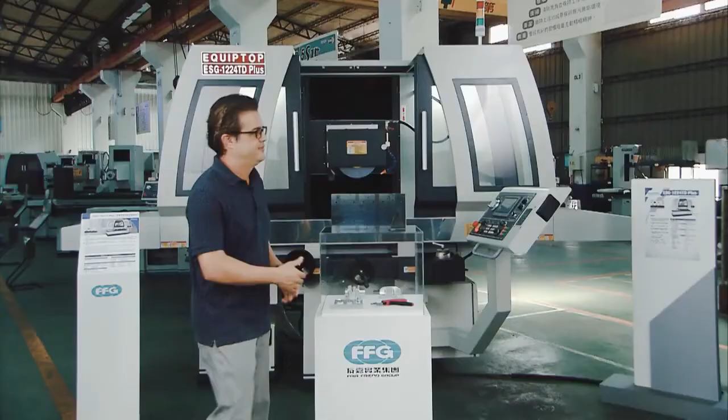How are you? Nice to meet you too. How did you do it?

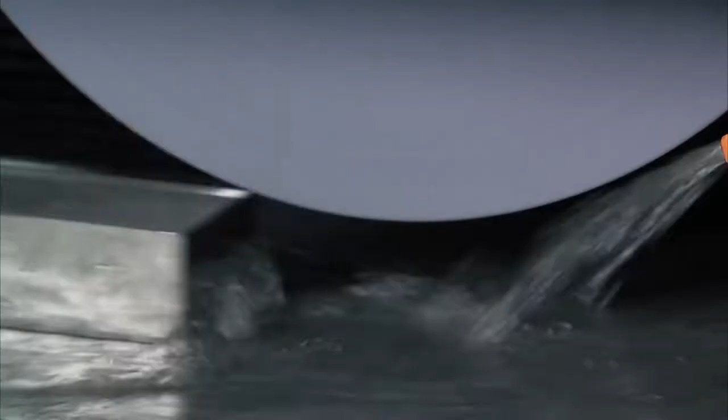Today we're at Equiptop, and we're going to have Paul Lin, the sales director of Equiptop, show us how to use this very well-designed touchscreen panel. Paul, can you show us how to use this?

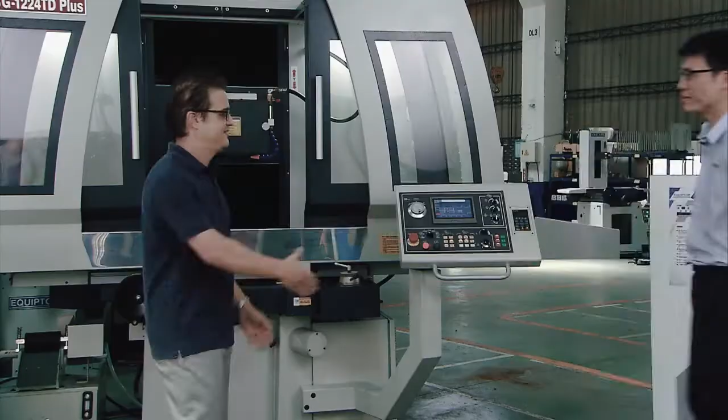Hello, Robert. Nice to meet you. How's it going, Paul? How are you? I'm fine. Good morning, sir. Can you show us how to use this touchscreen panel? Because it looks very well designed, very well laid out. Sure.

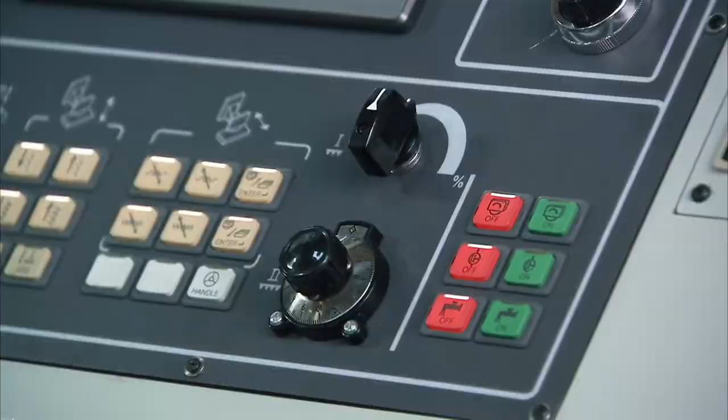Let me introduce the basic function. This controller panel includes several languages depending on the demand from the customer. Now I'll show you the English version. This machine displays the Y and Z position here by the encoder device.

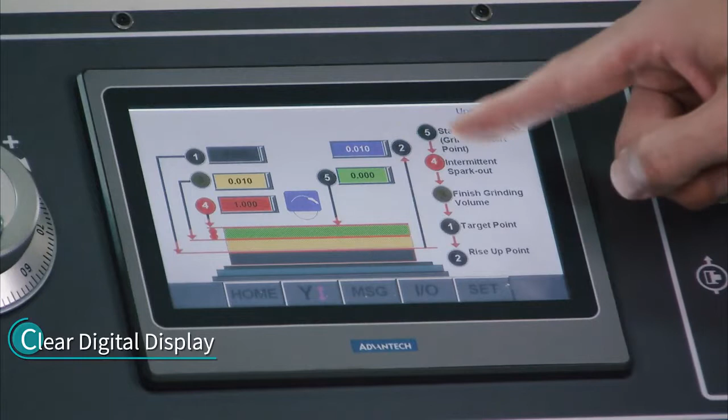You can set the touch point and the distance to go, the position, and the rough grinding and fine grinding micron setting. This page is for setting the micro downfeed, the grinding value setting operation. You can set the target point, rise up point, finish grinding volume, intermittent spark out, and the start point.

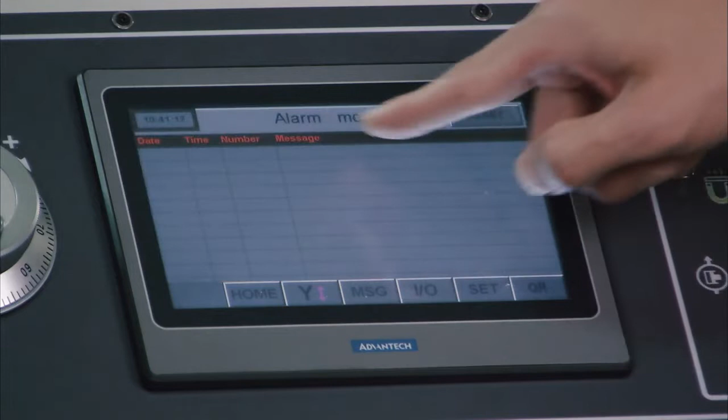This page will show you all the alarm message recordings. Any problems, we can see it right here. We can see the alarm message showing here and find the solution with the technician and the electrician immediately.

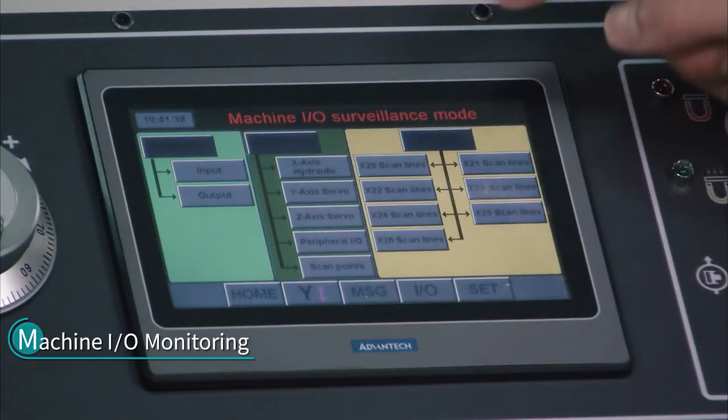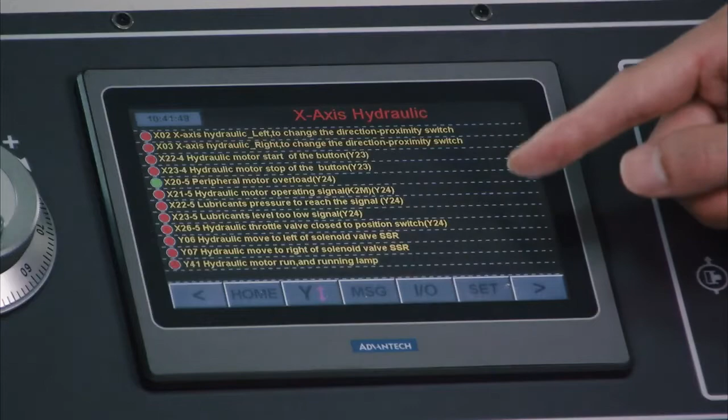Also, this IO monitoring page is to check all the devices, including this machine, how it's running, such as the hydraulic system. You can see each device, what happened. This is very detailed and comprehensive. You can see the servo motor for the Y-axis and its running condition here, like this one. And this is for the Z-axis servo motors.

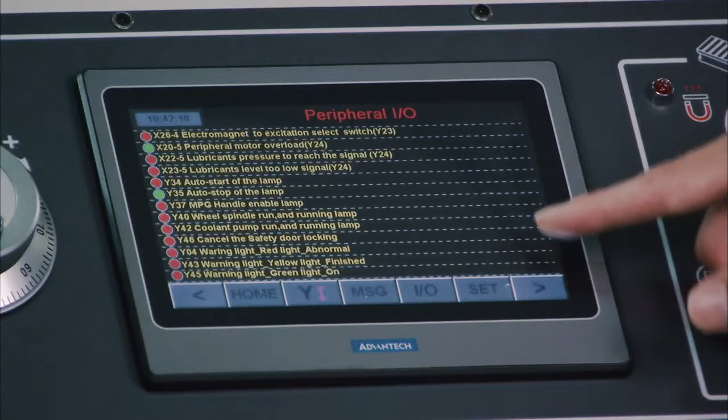Well, it's a very nice laid out panel. It looks pretty easy to use. I mean, it makes me want to feel like I want to get in the grinding profession. Sure, it's a friendly operation interface for the basic and for the professional operator and the technician. It's easy to understand how to use it.

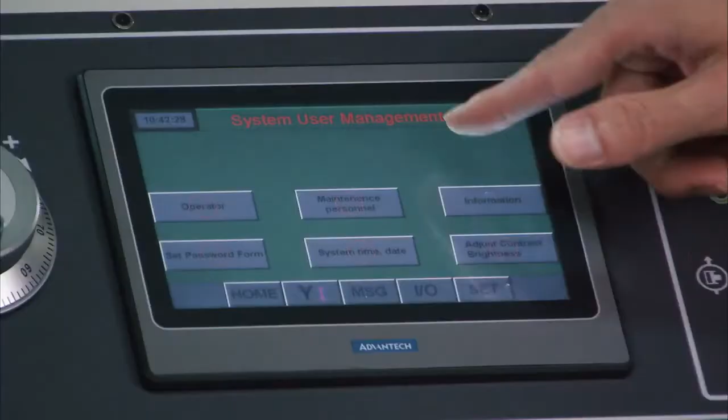And this is a parameter setting here. Any parameter could be set depending on the demand of the customer.

So we'll show you the other function about this machine. Now turn on the magnetic power here, and adjust the magnetic power to the maximum here, and finish grinding. Now this demagnetizer - it's possible to shorten the demagnetizer time here from this knob. This is a basic function and easy function to control the magnetic power here.

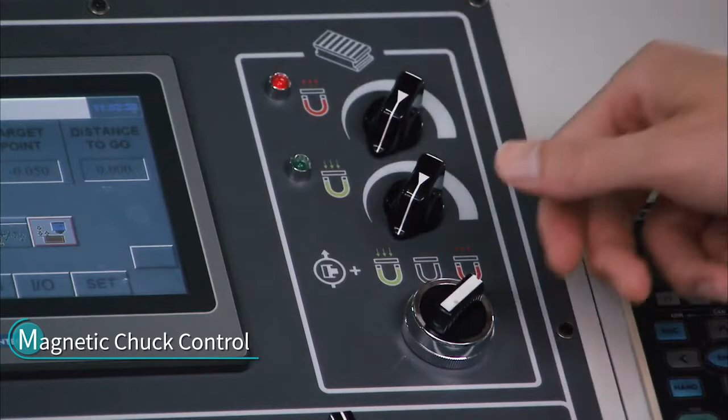And this one is to control the grinding wheel, hydraulic system, and the coolant system here. And this one controls the rough grinding speed - there are 5 grinding speeds here.

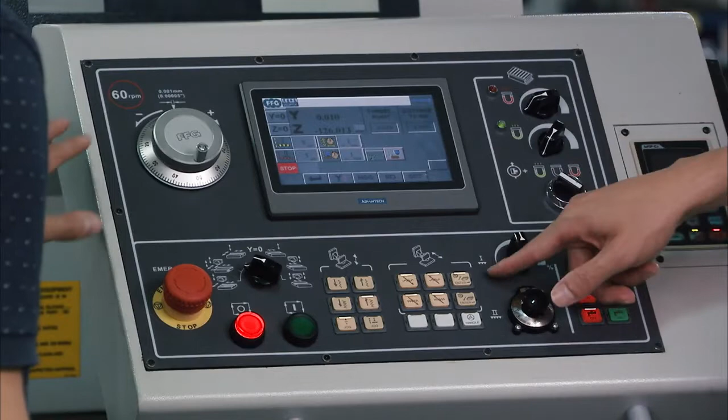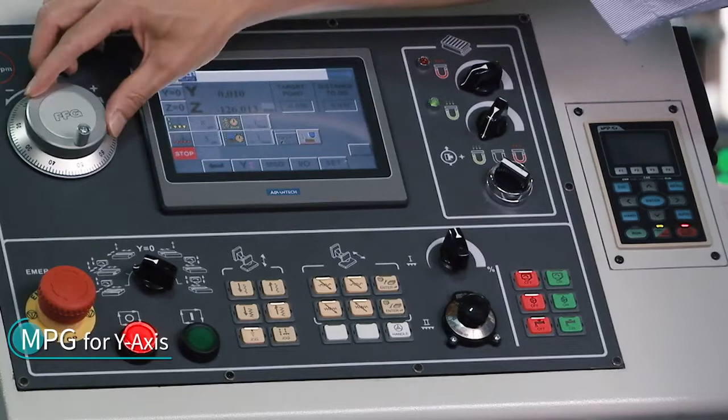I see you even have the MPG in the control panel. Yes, this MPG is a standard function for this machine. It could be adjusted 1 micron each time you turn each graduation here. That's very easy. It's very fine resolution here.

And this is for setting the point for backward and forward position here. When you want to operate the cycle start, just push here. Hey, I think I can do this myself. Yeah, you can see yourself.

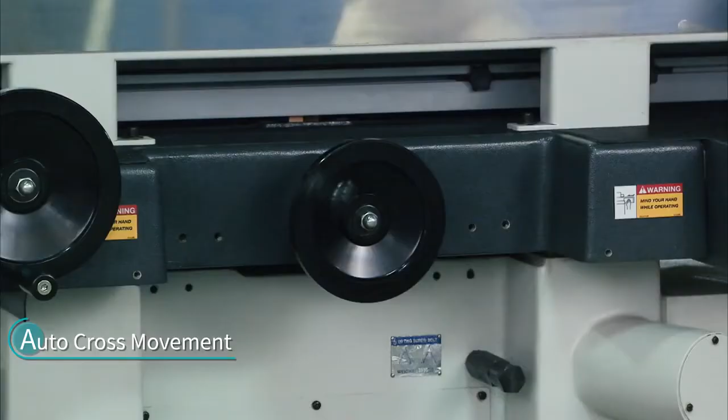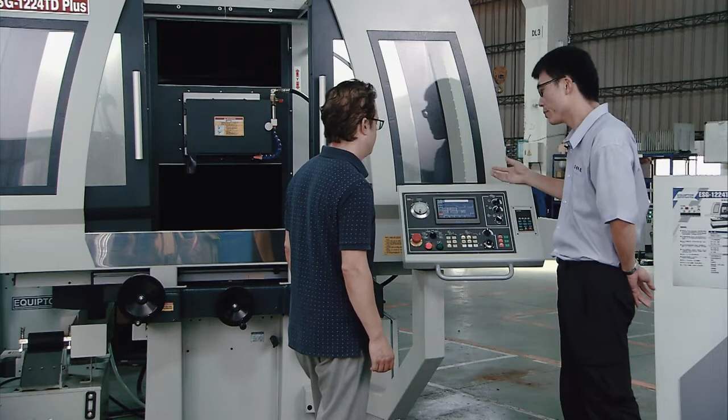Very good - this is to move the machine manually, and it's easy. Oh wow, and you can see the real-time position to move the table, depending on the size of the workpiece here. And this is vertical, up and down.

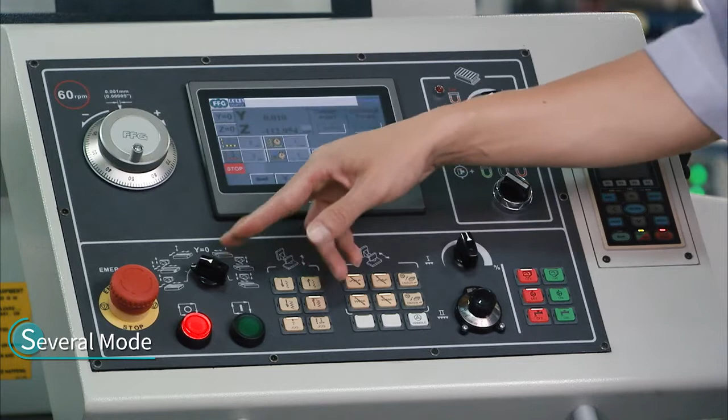You can select a different grinding mode here - this is the standard and the professional grinding machine. Now, what is this over here?

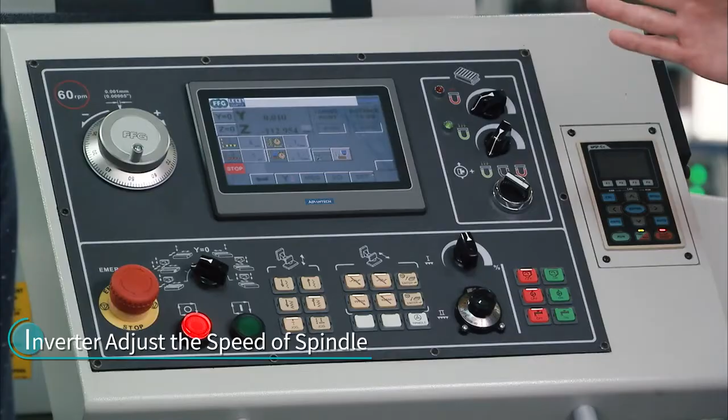This is the inverter to control and adjust the speed of the grinding wheel. So you can select faster or slower grinding speed, depending on the grinding material, to provide higher accuracy and surface finish requirements. Now, Paul, can you tell me a little bit about the structure of the grinding machine?

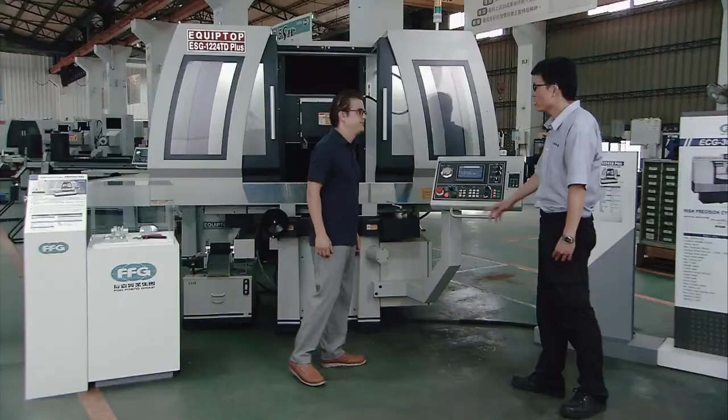That is a critical part for your whole operation, precision and accuracy. Our machine's high precision and stable iron casting is supplied by Meehanite system for the base, for the column, for the machinery body.

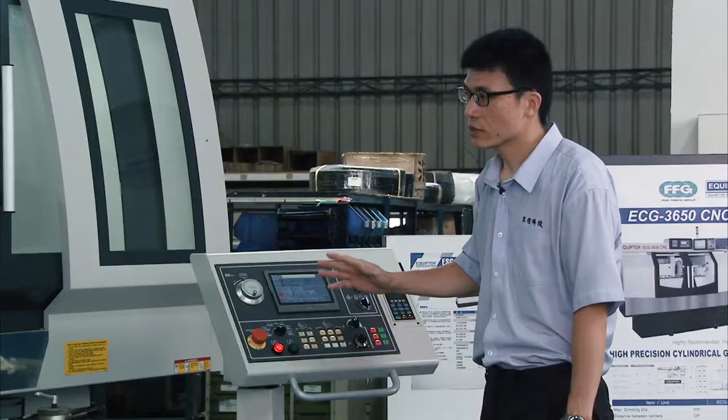The machinery Y and Z axis are driven by the servo motor inside the electrical cabinet, and the X axis is driven by the hydraulic system.

This hydraulic valve controls the hydraulic power, to control the speed of the machine running.

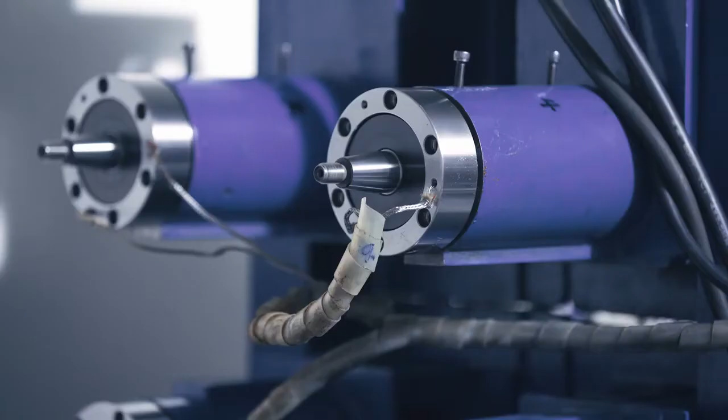The machinery overall has a full guard with top cover to provide better protection for the operators. And the bearing inside the spindle, supplied by NSK, provides higher accuracy and quality, precision, high quality bearings.

We can install the optional auto dressing system and compensation system on top of the grinding wheel. Normally here it's an option, our ADC system.

Now we're going to hear from Paul more about the smart manufacturing capabilities. It's intelligent, it's networked, and it's got lots of features to help the operators, right, Paul?

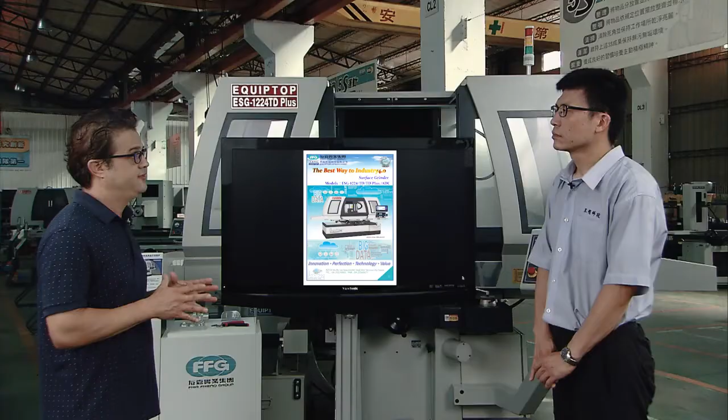Yes, this machine ESG 1224 TD Plus is the best way to Industry 4.0. Later I will introduce information about the network and the monitoring system assembled in this machine.

This machine includes cloud computing, big data, HMI, and IoT system. It also provides efficient network service such as integrated network information, in-time maintenance with guidelines, remote checking and system maintenance, reducing service time and increasing efficiency.

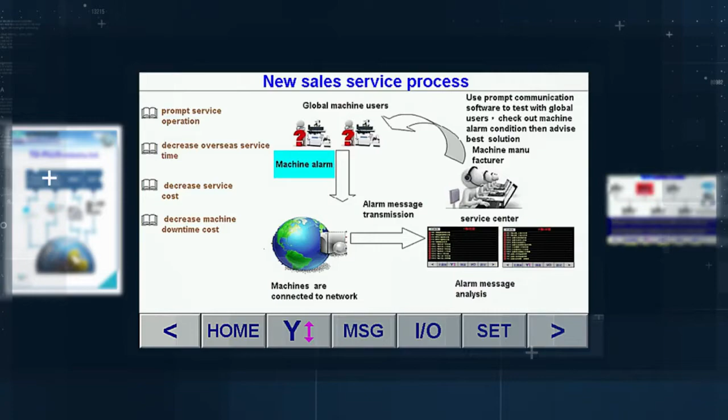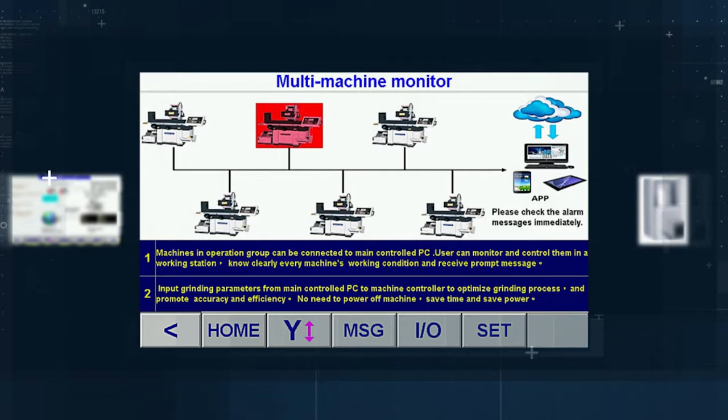It also collects maintenance data and builds a database. The machine monitors all equipment continuously, setting parameters without temporary stoppage, and transfers and stores data in cloud service by internet.

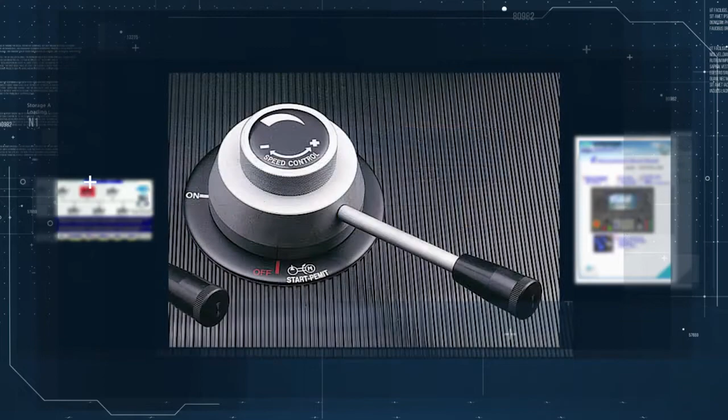The machine is assembled with honeycomb structure and high precision motor, also high precision sensor and hydraulic storage valve and recirculation mechanics systems.

The TD machine includes several languages for operation, easy and convenient for the demand from customers in different countries.

The digital man-machine interface includes the high precision spindle and the electronic billboard and the production record, also the spindle status.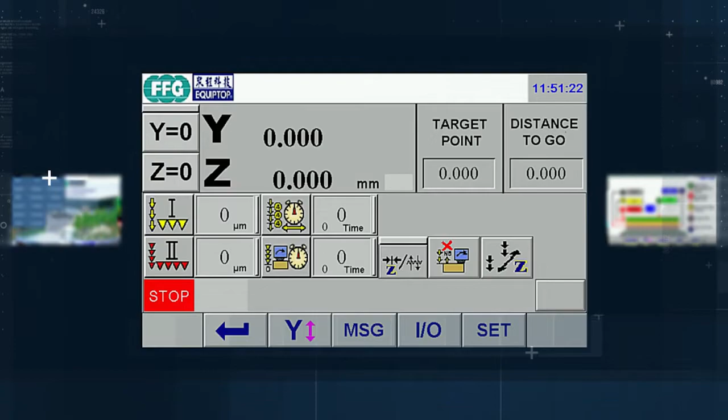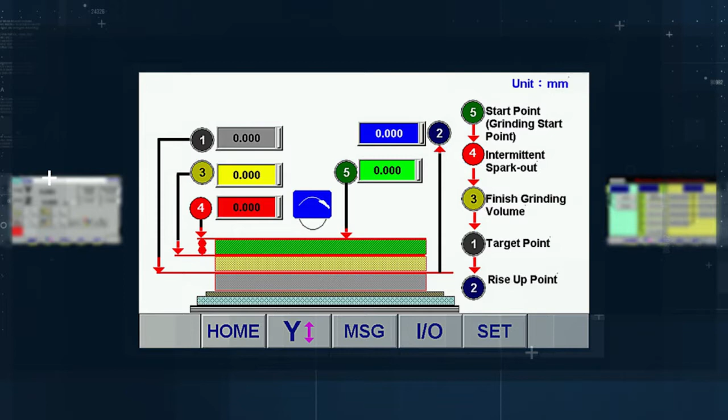Intelligent processing includes the rough grinding, flow chart about the grinding value setting, and the grinding system, also the intermittent spark out.

The machine I/O monitoring is a separate system, and the sensor status also includes the security systems controller system. The online I/O monitoring provides cloud storage and signal monitoring for error feedback from the manager and operator systems.

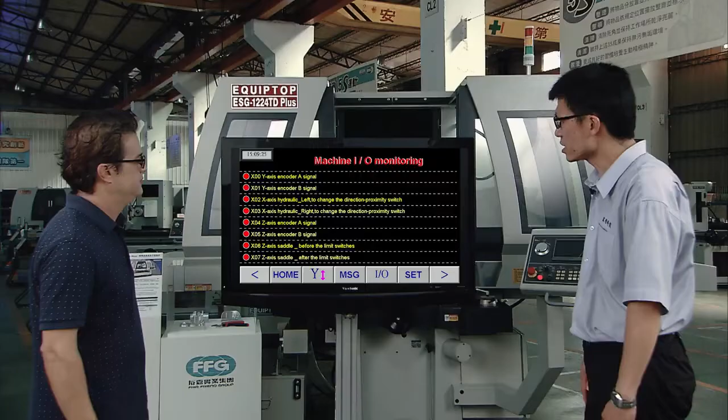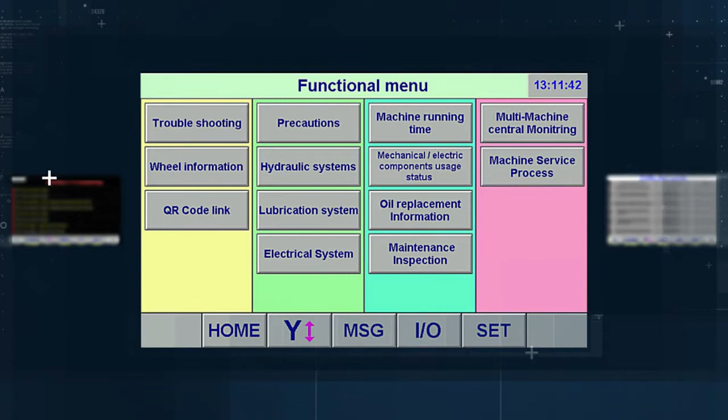Lubrication management provides information about the lubrication oil, for when the operator would like to replace the lubrication oil, and other maintenance systems.

Selection about the grinding wheel: depending on the material of the workpiece, the customer and operator can choose the available materials.

The ADC system means the auto dressing and compensation system, and provides the dressing, display, and parameter setting and mistake proofing.

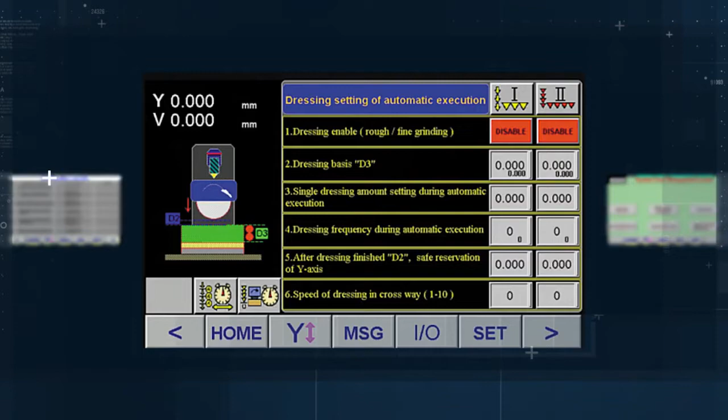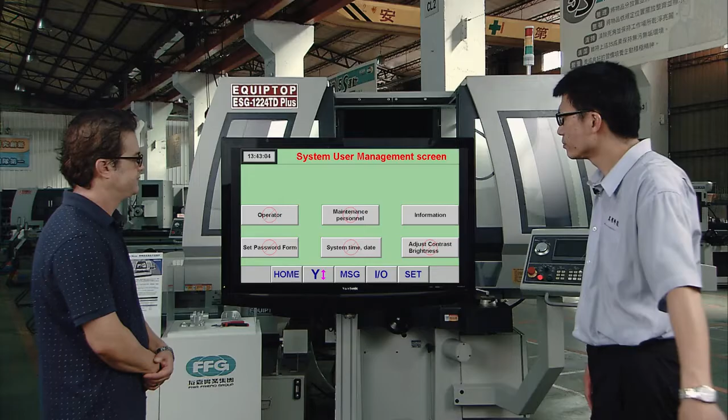The manager screen includes parameters for maintenance personnel. The dealer security system provides the machinery serial number, the machine timing, and the unlock password.

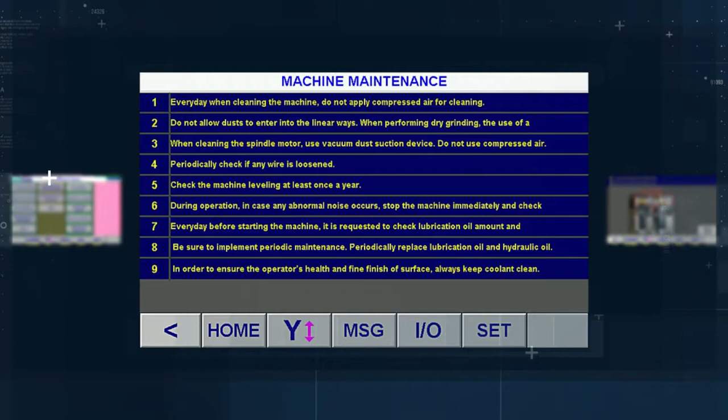The big data database provides functional menus. The system maintenance provides machine maintenance parameters and setting parameters.

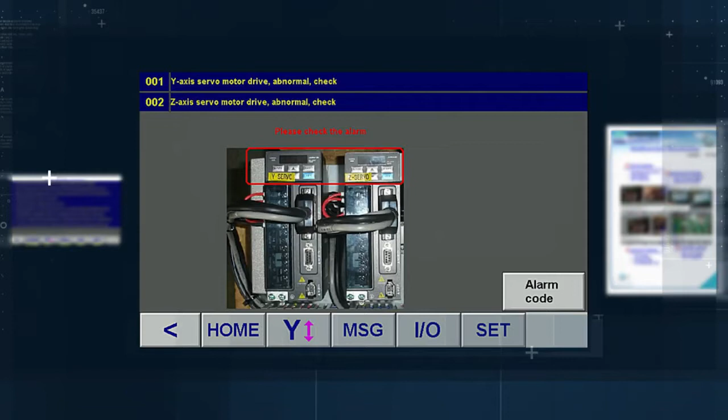The driver debug is the alarm code that will be shown and displayed on the servo motor, and the customer and operator can refer to the menu operation to find the alarm code and find possible solutions.

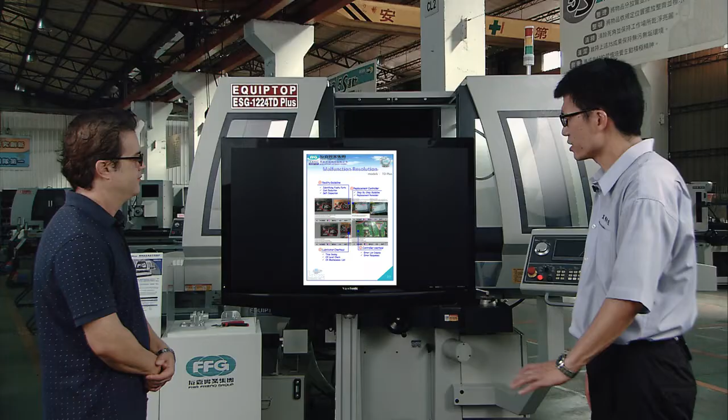Finally, this machine has obtained patent certification for the controller in Taiwan, providing necessary and helpful information for the customers.

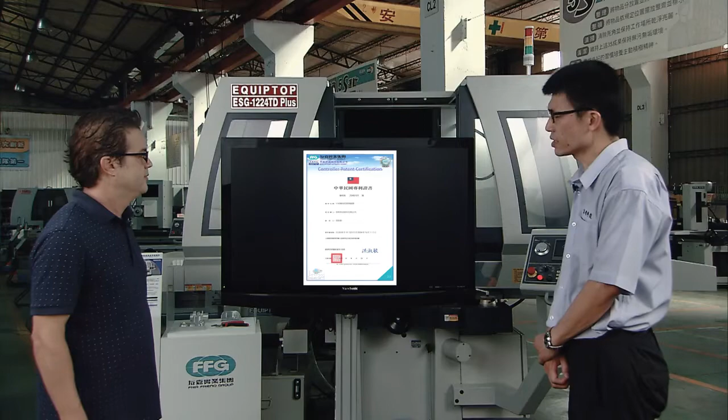Yeah, that's amazing. It's got so many features. You got a patent, you have smart features, it's intelligent, it's networked, it's everything somebody could want in a grinder. Thank you very much, Paul, for sharing this. Thank you, Robert.

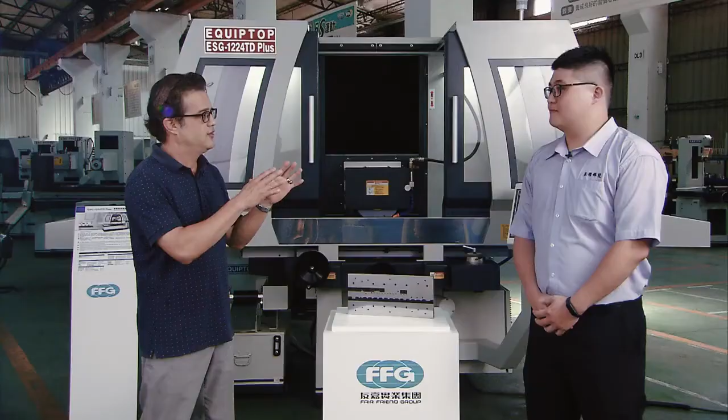Now we have James. James is a sales engineer with Equiptop, and he's going to show us how they do the QC for this company. Welcome, James. Thank you, Robert. Nice to meet you.

Your boss said making a beautiful workpiece like this, with a perfect surface finish, requires really important things, especially quality control. Can you tell us a little bit about how you guys do it here? First, I want to introduce our spindle. Ah, that's the key part. Yes, that's a very, very important part for our grinding machine.

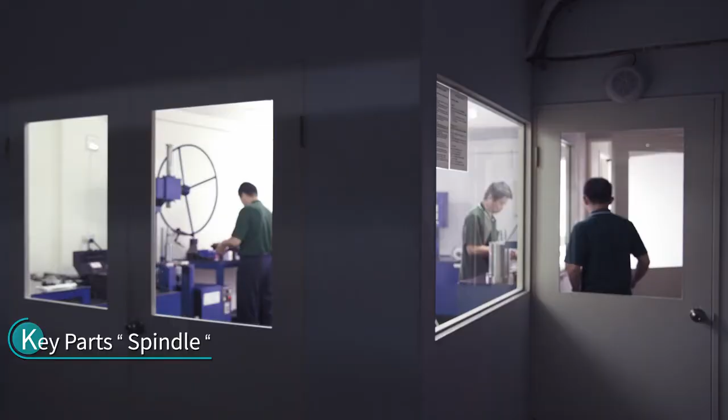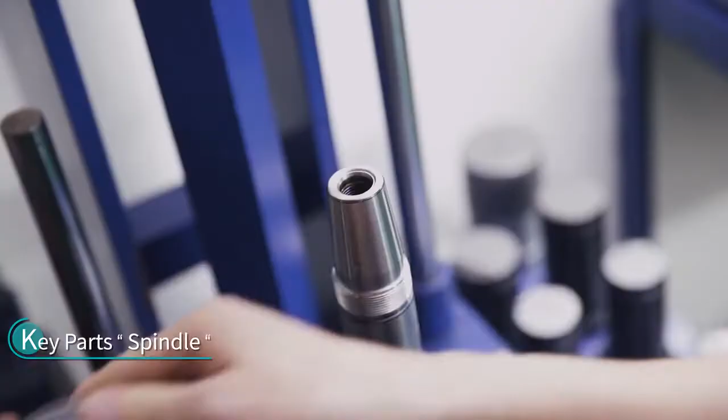And in our spindle room, it's a small dust-free room. We have to ensure our spindle will not be contaminated during the assembly process. So you assemble your own spindles? Yes. That's really critical, because if you handle this part well, it's going to make a perfect machine.

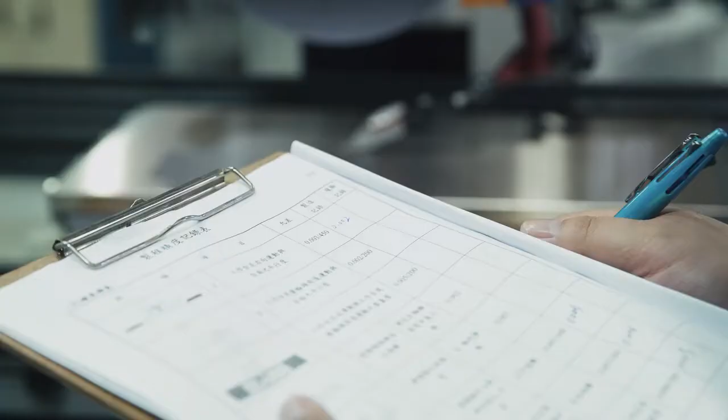I see lots of signs around here, and I'm feeling there's something different you're doing for your manufacturing and quality control. What do you guys do here that's different? Let's call it lean manufacturing. It's very strong, and the most important part is continuous improvement. Now, that's not easy to do. I hear from a lot of people that this kind of system is very painful at the beginning. Yes, it's really tough at the beginning, but after you use it and rely on it day by day, you can keep improving.

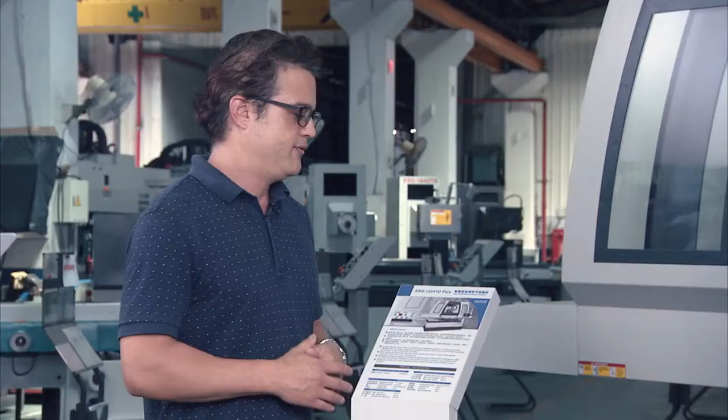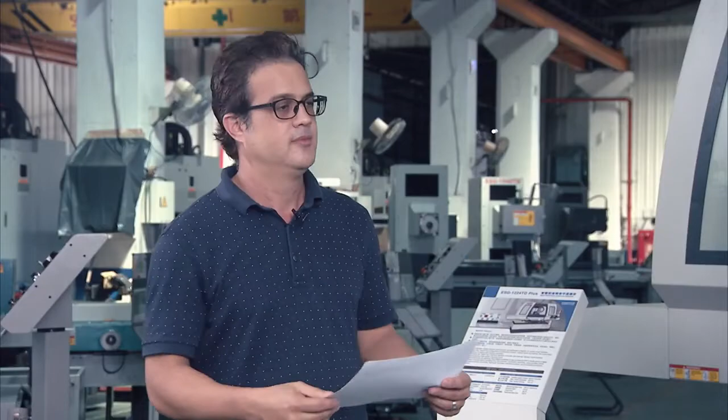Now, I saw that you have some kind of list here. This has something to do with how you inspect each machine, right? Yes, this is our accuracy list, compared with international standard inspections, like ISO and CNS. So we set up our own standard. So all these Equiptop standards are a bit higher than international standards. Even quite a bit higher. Well, let's see some grinding. Can you show us? Okay, let's go.

Now, Equiptop has said they've sold over 2,500 of these TD series machines around the world. That means there must be lots of customers who have good things to say about these machines, right, Paul? Yes, sure. We sell our machines not only in Taiwan, but also to the United States, European countries, Asian countries, and others. Later we will show some witness videos from our agents around the world. Excellent, well that means we have some good things to see. Stay around and see some witness testimonials.

Hello everybody, my name is Lubos Valenta and I'm the founder of EDM Trade from the Czech Republic. Our company has been cooperating with the manufacturer Equiptop for more than 10 years and our experience has been really good. Their products are of good quality and bring value to the customer. If service is required, the manufacturer will provide support to our technicians. On my behalf, I would recommend the purchase of Equiptop to customers. Really, I do. I wish you all the best. Bye.

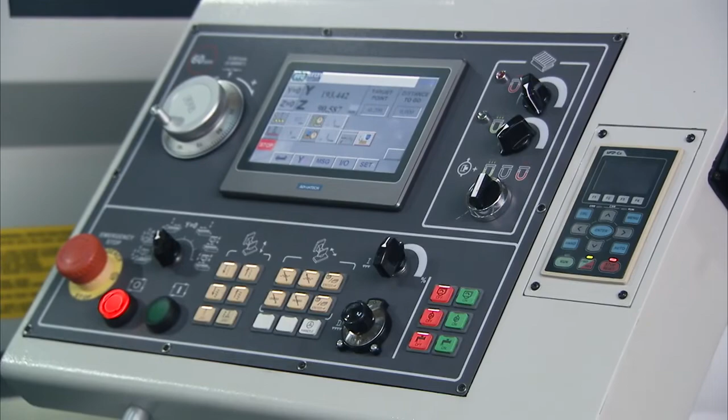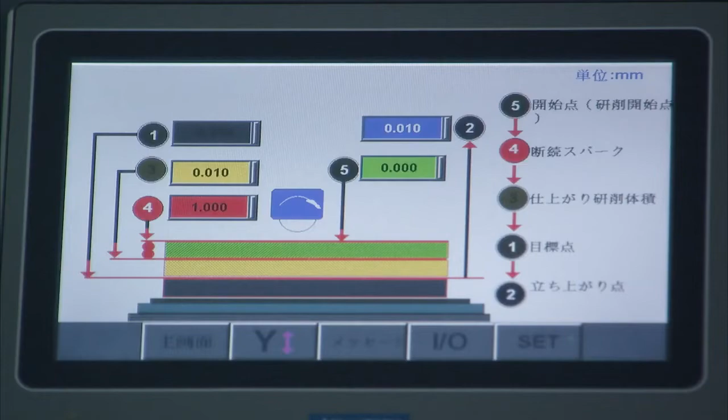Some of the first questions we have is, what's the difference about this grinder compared with others available in the market? The main difference between our machine and the competitor's, I can share some information. First, our machine could include several languages for different customers, so they can understand how to use the machine by messages in different language versions, and operate it easily.

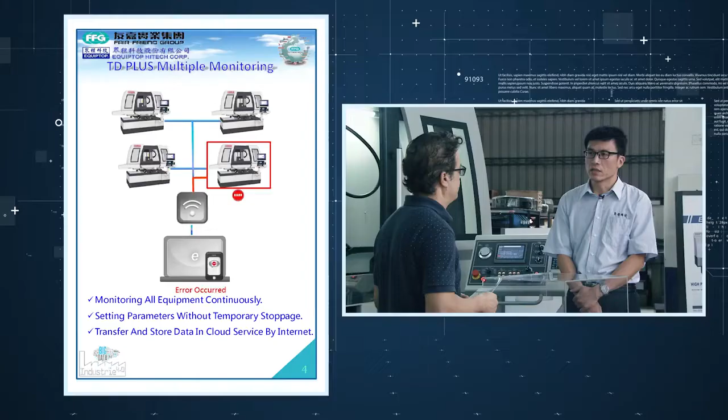The second, our machine provides an instant monitoring system. That's very important. Service engineers and electricians can find the possible solution according to the alarm codes displayed on the controller panel.

Third, our machine could be installed with the auto dressing and compensation system on top of the grinding wheel. So the grinding wheel doesn't need to go down to the table to dress the wheel, and the grinding wheel could be dressed by the dresser in the auto dressing device immediately.

Finally, our machine has over 2,500 machines sold to the world. No matter in Taiwan or in other countries, they are our best witness about our machinery's high quality and best information systems.

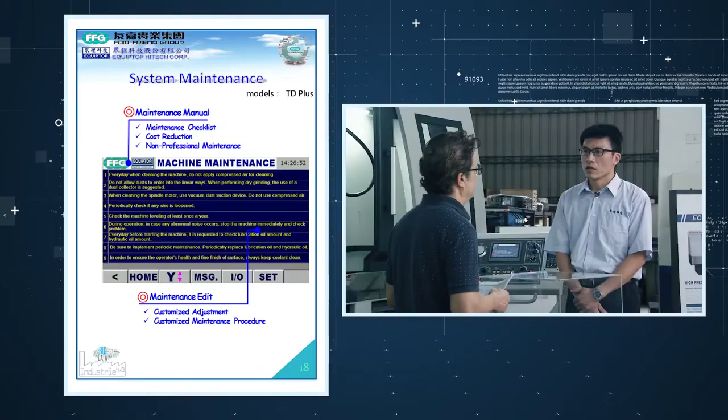Now, when comparing your machine with other machines, of course you have very top and tough competitors from Europe and Japan. How do your machines compare to some of those top brands? Compared with competitors from Europe or Japan, we can provide the machine with lower cost and higher quality, depending on our machine's instant service system inside the machine, network and monitoring systems. So it is better.

Higher CP, right? Cost performance much higher, yes.

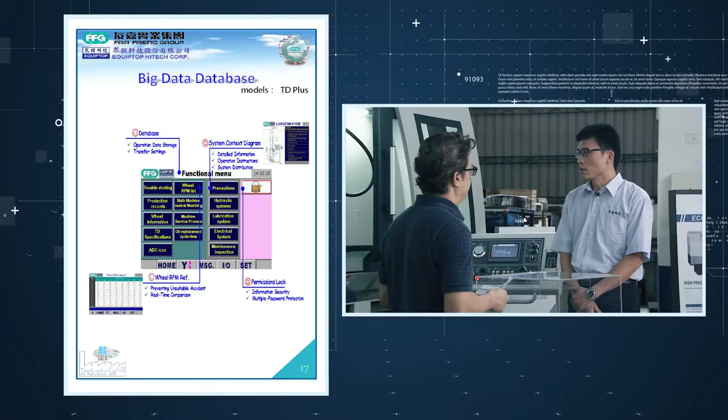How do your machines compare when we talk about quality with European or Japanese machines? Our machine provides higher accuracy because the monitoring system inside provides necessary and helpful information to support the technician and operator to find the possible solution. Our machine provides stable operation and nice quality due to the nice iron casting during assembling.

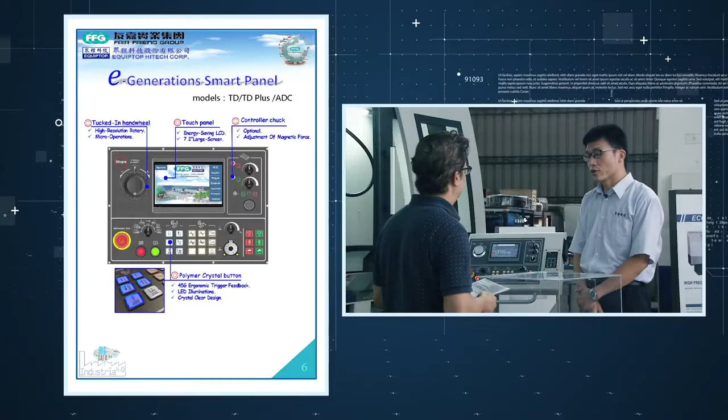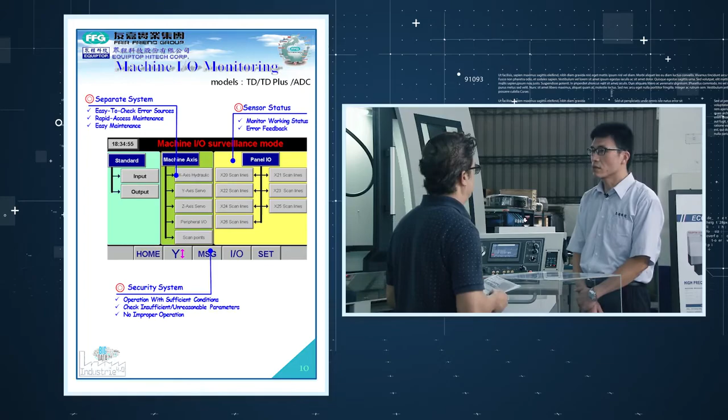When you compare to these other famous brands, for example compared with Studer, what are the major differences? I think our machine's main feature is the necessary information inside the controller system, providing helpful and instant service information to support the operator. If they find a problem, the operator can find a possible solution immediately using information such as grinding wheel details, also quick troubleshooting information.

So this is all within your database system. You have an extensive database, you've sold 2,500 machines, so you have a huge amount of information.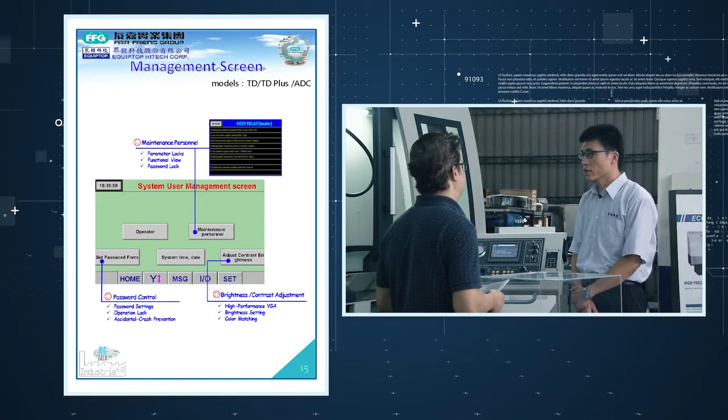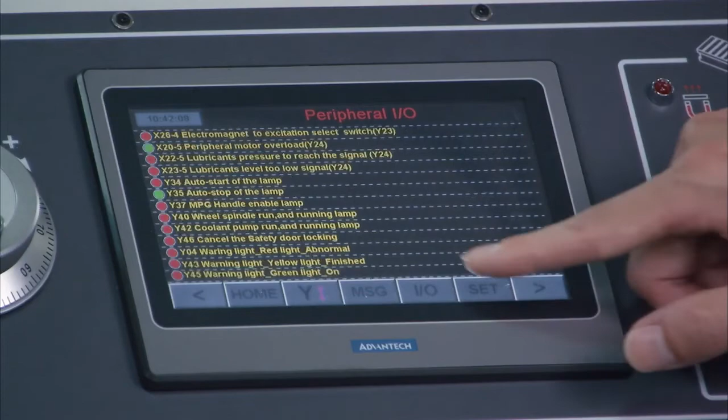Our database inside the machine includes a lot of helpful information to support technicians during grinding operations. It helps find the possible solution if any alarm call shows in the machine, providing necessary information like a manual operation, so the technician doesn't need to find a paper manual — you can use the controller to find any possible solution.

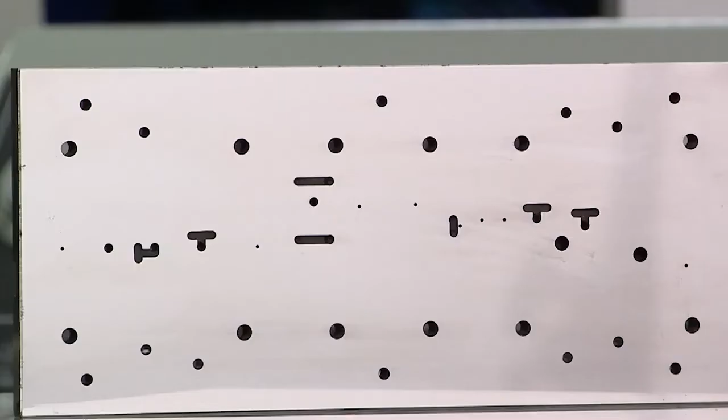Now, how about application-wise? What kind of applications or industries is this machine suggested for? Our main customers use our machine focused on the mold industry and auto parts industries. They can grind the mold with basic rough grinding or fine grinding to achieve mirror surface grinding, like some of the parts we saw earlier.

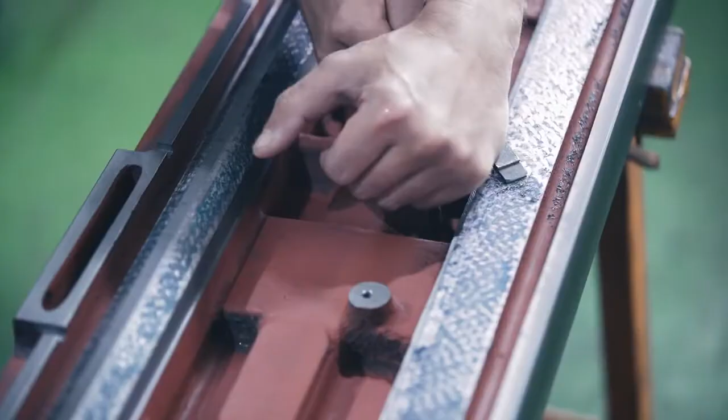Why is your accuracy a bit higher than other brands out there? What are the specific reasons it's more accurate? I think machinery accuracy depends on assembling quality and the quality of iron casting. Our machine has better features because our iron casting provides heavier material and stable operation for customers, giving nice accuracy due to the stable iron casting and nice assembling process, plus the instant service and electrician support systems inside the controller. It is a nice choice for our machines.

Thank you, Paul. I can tell from all the information you provided, this is really a solid machine. But I'm sure if customers have any more questions, they're going to definitely want to contact Paul at Equiptop.